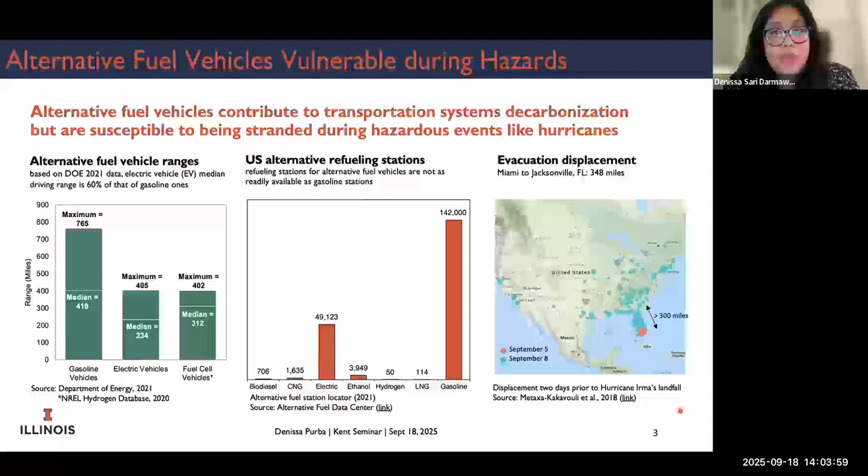While these technology specifications can still facilitate our daily mobility, they might challenge evacuation operations. A study of the evacuation movement of Miami residents during Hurricane Irma shows that the evacuation distance can far exceed 300 miles, exceeding the average driving range of some alternative fuel vehicles in the current market.

We also observe, especially in the US context, more frequent hazards in several regions that might require evacuations, such as hurricanes, severe storms, flooding, and also wildfires. As alternative fuel vehicle adoption increases, especially in these hazard-prone regions, it becomes very critical to provide evacuation preparedness planning for alternative fuel vehicle adopters in the future.

And since the introduction of alternative fuel vehicles in the US market, we found that there are no adjustments to the evacuation policy. FEMA and the Federal Highway Administration suggest that evacuation route planning needs to provide access to gasoline stations to guarantee the opportunity to refuel. However, there is no specific regulation on how alternative fuel vehicle drivers can access their refueling stations.

And then in the literature, in terms of modeling, evacuation models often neglect the range constraint and access to refueling stations. Most of them assume that every evacuee could always reach their destination without the need for refueling. And some models assume that refueling infrastructure networks are strategically located to allow every evacuee to refuel. While these assumptions can be applied to gasoline or conventional vehicle evacuation models, they might not be true for alternative fuel vehicles.

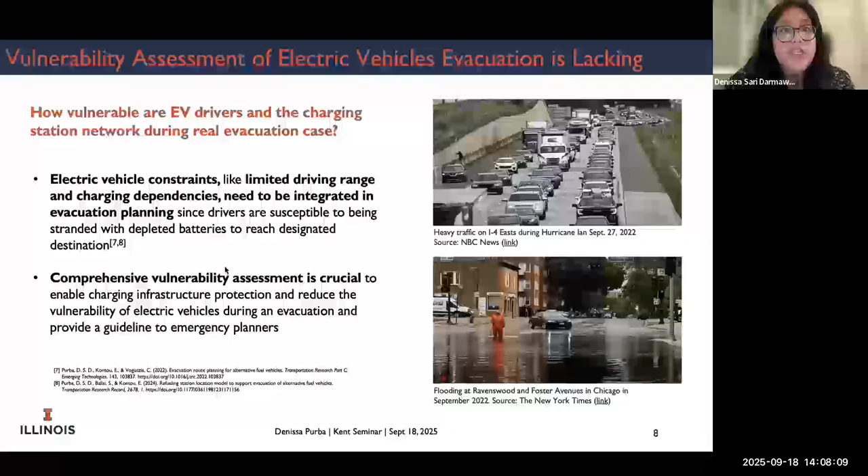Comprehensive vulnerability assessments become very crucial because in emergency planning, it becomes the first step for us to identify and measure the vulnerability of the evacuation systems, and also enables us to identify what kind of strategies and protection are needed to safeguard the infrastructure systems.

So in this work, we aim to develop a multi-criteria vulnerability assessment framework dedicated to EV evacuations. And we will assess current vulnerability of EV evacuation in 2 hazard-prone regions. Our approach consists of 3 main steps. First is the data collection to develop a representative evacuation network that can help us simulate the EV evacuations. The data collection consists of the hazard intensity, which is the hazard footprint itself.

We also consider the transportation networks and the charging station networks, not only the locations of the stations, but also the number of ports, type of the stations, and the capacity of the stations. We also collected the evacuation demand that we want to simulate in our evacuation networks, and also the share of vehicle registrations to design the shares of alternative fuel vehicles or electric vehicles in our networks.

Then after we construct the evacuation networks, we conduct the simulations for the hazard and the evacuations. We compare the evacuation performance under non-disrupted networks with the evacuation performance when we consider the impact of the hazard and disrupted networks on the system. And then we assess it with the vulnerability diagram.

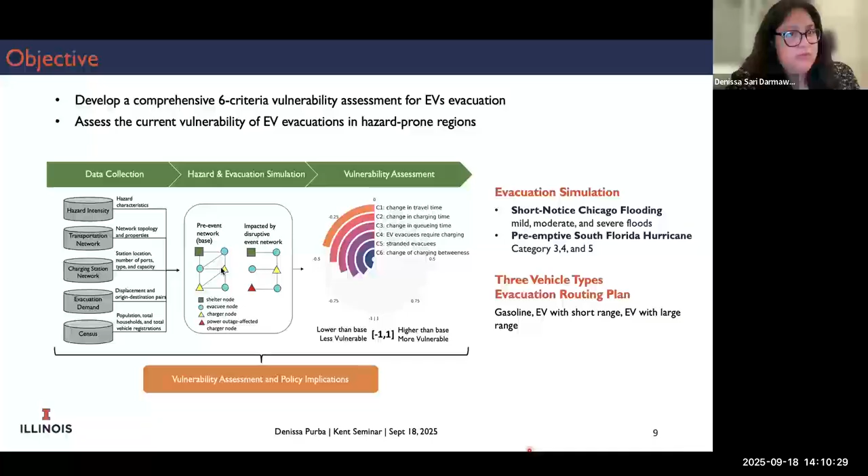Now I will talk more about the multi-criteria vulnerability assessment diagram that we propose here. It consists of 6 criteria that represent 3 components that we want to assess. First is the system level performance. We use 3 criteria to represent the system level performance during evacuations, which are the changes in average system travel time, charging time, and queuing time.

The second component that we want to measure is the evacuation mobility. We want to understand the total number of EV drivers that require charging and how many of them are stranded or isolated due to disconnected or disrupted networks. The last component is the charging station accessibility. We use betweenness centrality to measure the accessibility of charging stations used during evacuation processes. And then we present it in a radial diagram like this and normalize the values between -1 and 1.

Here is the Chicago flooding hazard scenario. We consider 3 types of flooding risks: first mild, then moderate and severe. All of the flooding footprints we collected from the FEMA Flood Map Service Center, and then we complemented them with MRCC Southwest Lake Michigan Regional Flash Flood Monitoring.

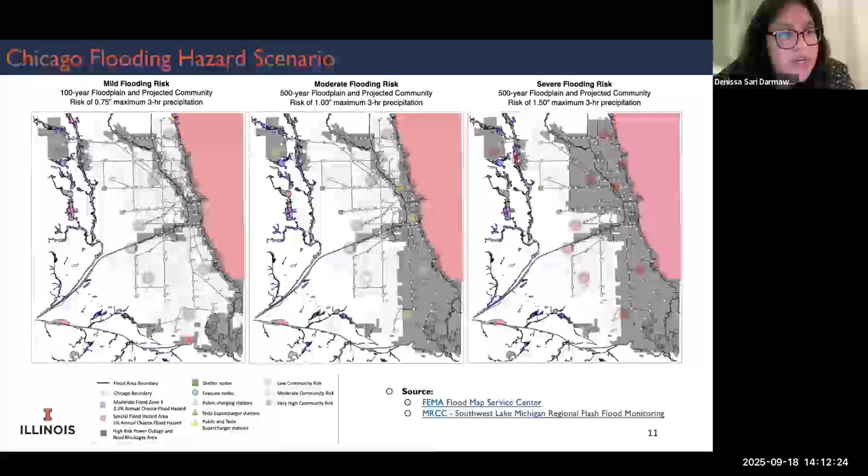For each flooding risk, we define a certain area where we assign a probability of power outages and also road blockage. So you can see this gray area here, we define it as a high-risk power outage and road blockage area, and it keeps increasing as the hazard intensity increases.

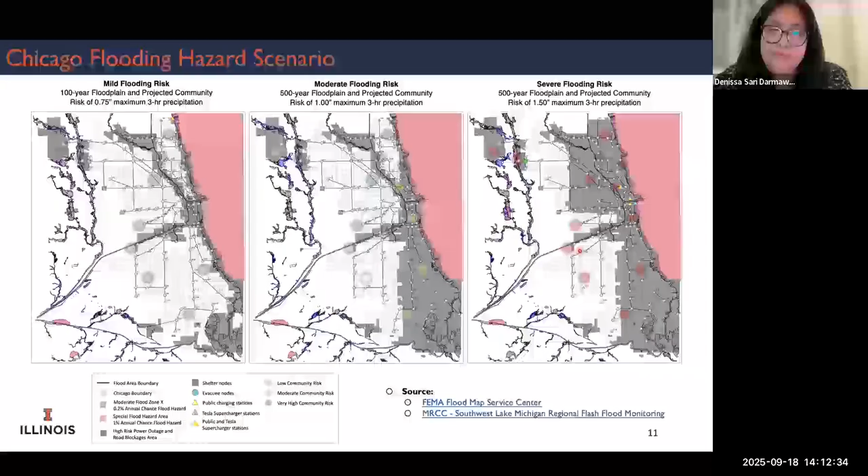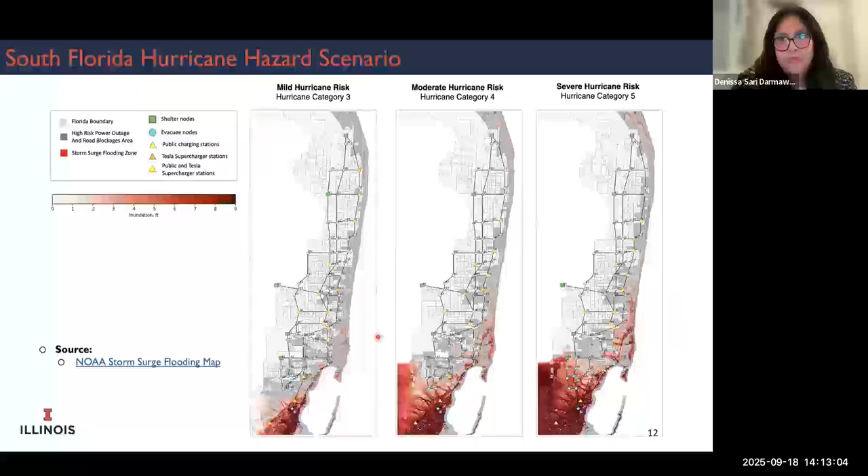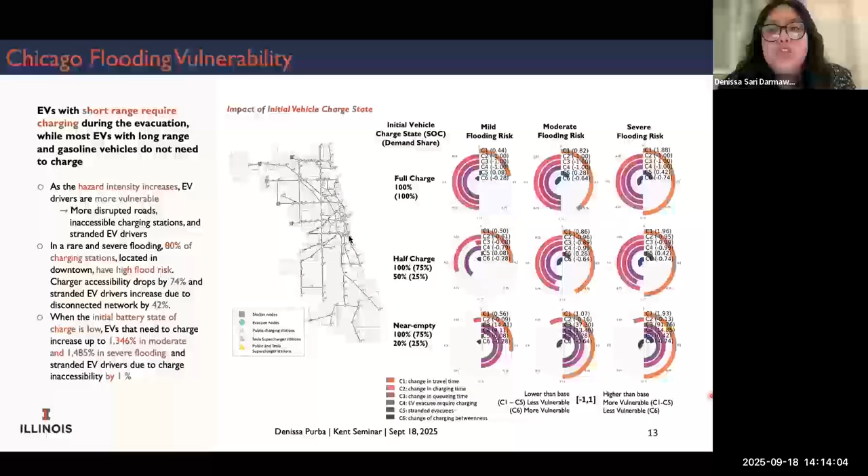Some key observations we found here are that EVs with short range always require charging during evacuation, while most gasoline vehicles and EVs with long range do not need to charge in these evacuation cases. And in rare and severe flooding, about 80% of charging stations located downtown have a high flood risk. The charging accessibility dropped by 74%, and stranded EV drivers can increase by 42%.

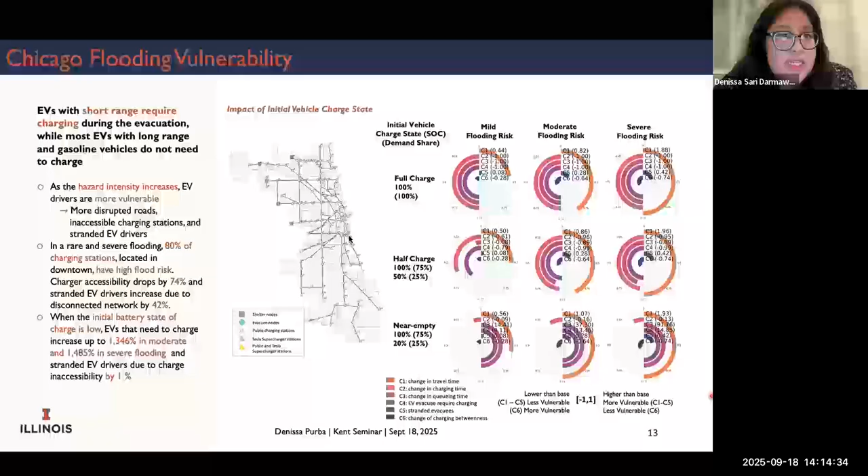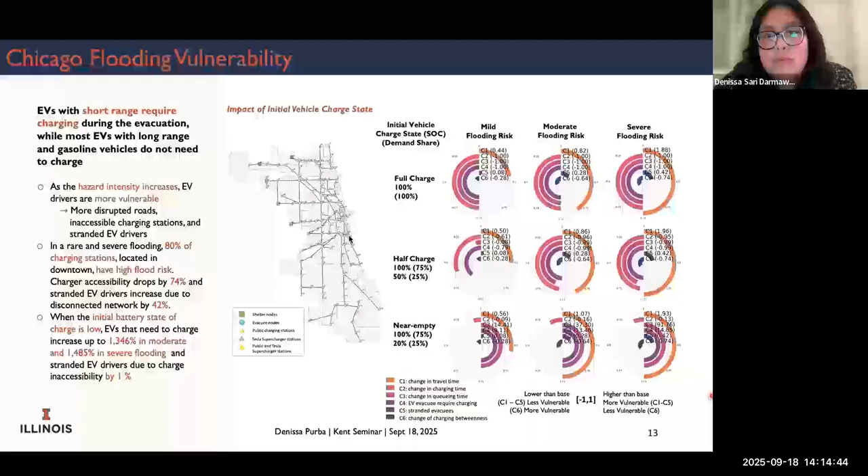When we consider the near-empty initial state of charge, we notice that the number of EV drivers that require charging, even in these small networks, can increase significantly due to the near-empty battery levels.

Here I also plot the energy demand profiles for Chicago evacuations. I think it will be of interest to some of you. I just want to highlight that our model can also show the energy demand profile for each charging station in our simulations.

The findings that we found here is that charging stations that are close to shelters, the shelters in the north zone here, are subject to higher charging demands. In our simulations, on average, the maximum expected energy demand in Chicago is about 337 kilowatt hours in mild, 270 kilowatt hours in moderate, and about 213 kilowatt hours in severe flooding.

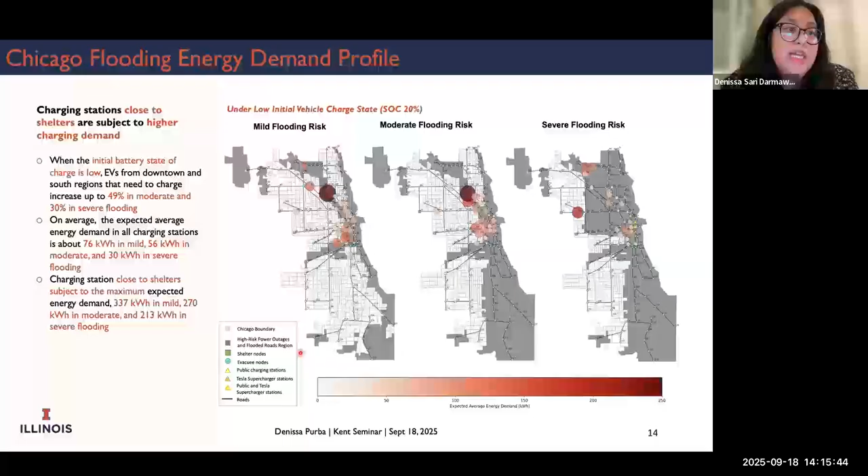Next, we also explore the impact of cold weather in Chicago evacuations. We consider three types of weather: normal weather, moderate cold, and extreme cold. And we translate these temperatures into their impact of reduced battery efficiency. So in normal weather, we consider that the vehicle's battery performs at 100% efficiency, moderate cold about 80%, and in extreme cold, it drops to 60%.

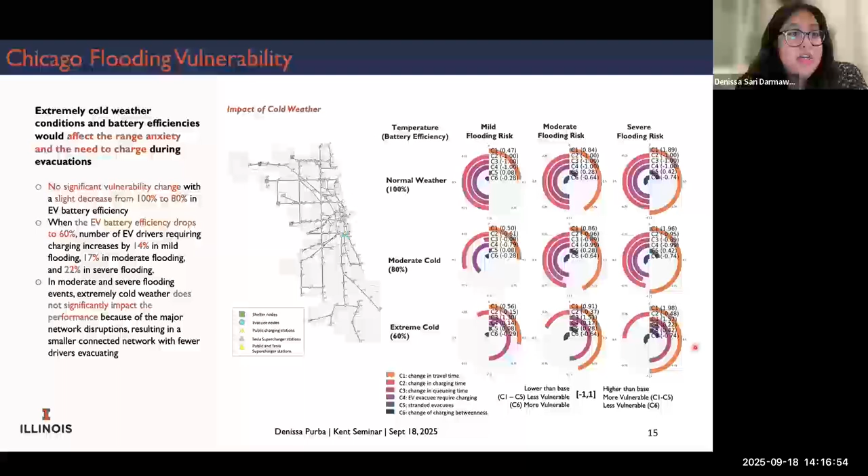And again, we visualize it with a 3x3 diagram to show the impact of increased flooding intensity and these different weather temperatures. So we found that extremely cold weather conditions and battery efficiency would affect range anxiety and the need to charge during evacuations. But the drop of 20% of battery efficiency from 100 to 80 is not really significant to the vulnerability changes. However, when it drops to 60%, we noticed that the number of EV drivers that require charging increased significantly, by about 14% in mild flooding, 17% in moderate flooding, and 22% in severe flooding.

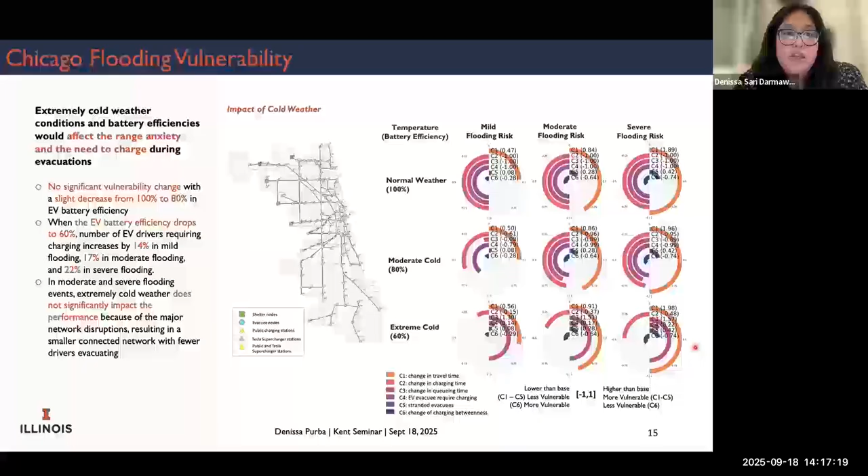Lastly, we assess the vulnerability of South Florida EV evacuation. In this case, we only consider the impact of initial vehicle state of charge because we noticed that during hurricanes, usually the temperature doesn't really change. There is no cold weather there. So we think that the impact of extreme weather is not relevant for hurricane evacuation. That's why we only model the impact of initial vehicle state of charge. Again, we visualize it with a 3x3 diagram.

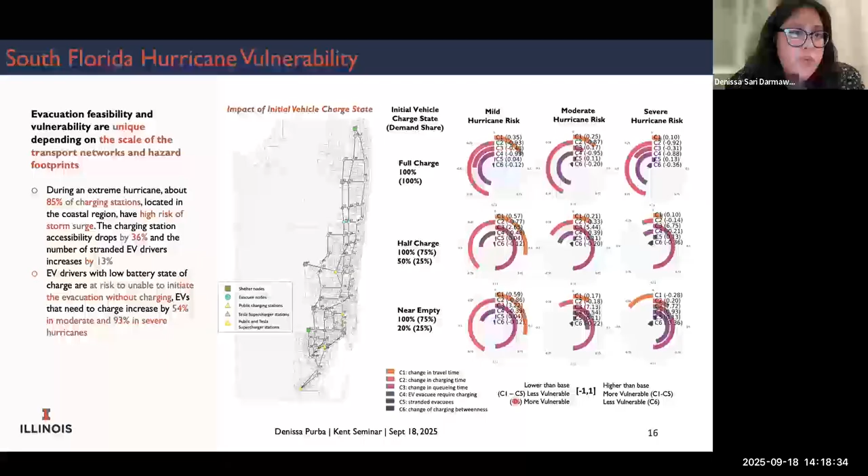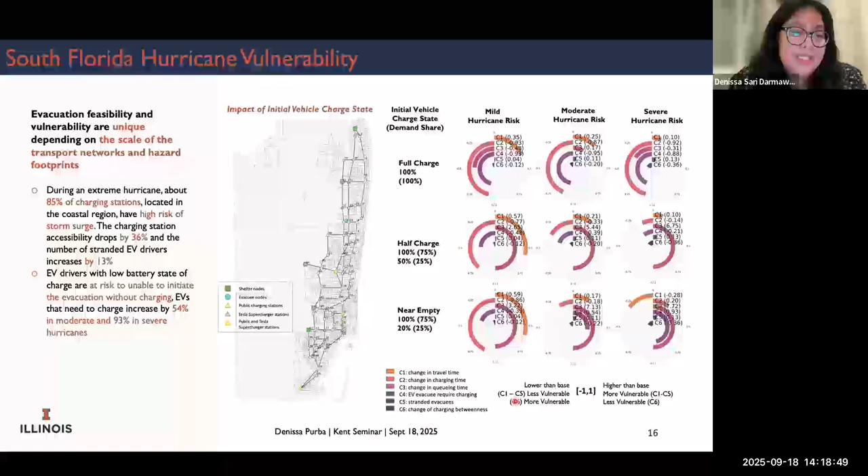Some findings that are interesting here is that the evacuation feasibility and vulnerability are unique depending on the scale of transportation networks and the hazard footprint. About 85% of coastal charging stations are at risk during an extreme hurricane, reducing their accessibility by 36% and increasing the number of stranded drivers in the network by 13%. And when we consider the near-empty cases, EV drivers with low battery state of charge are at risk of being unable to initiate their evacuation without charging. And we can see here that the EVs that need to charge increased by 54% in moderate and 93% in severe hurricanes.

So to summarize this work, we found that most EV drivers in the networks could evacuate safely with or without charging in mild and moderate hazard events. However, some EV drivers, especially those with short-range battery vehicles, rely more on charging station accessibility to complete their evacuations. We also find that driving range and charging station networks define existing EV evacuation risks. As hazard intensity increases, we consistently see that EV drivers become more vulnerable. However, the feasibility and vulnerability of evacuations are unique depending on the scale and properties of the networks and the hazard footprint. And the initial EV state of charge will determine the feasibility to initiate the evacuations. So that's about the vulnerability assessment work.

Now I will talk about the evacuation behavior of electric vehicle drivers. Here we conducted route and charging choice experiments. This work is advised and collaborated with Dr. Eleftheria Kontou. So now we're talking about behavior analysis during evacuations. Based on past literature, evacuation decisions depend on individual and household decision making. These factors can influence our decisions in evacuations. For example, do I need to evacuate? Where should I evacuate? When should we evacuate, or how should we evacuate?

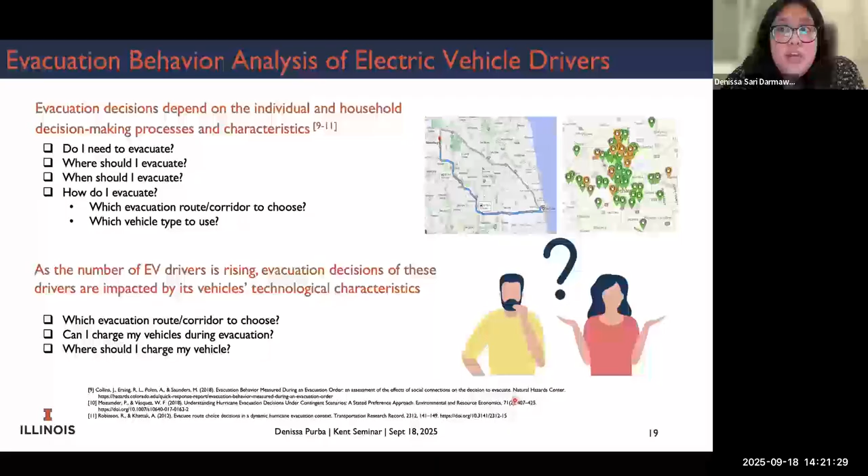Now, as the number of EV drivers rises, we believe that evacuation decisions of these drivers are also impacted by the vehicle's technological characteristics. The introduction of EVs might create new decision questions in the evacuation behavior field: which evacuation route should we choose so that I can charge my vehicle? Can I charge my vehicle during evacuation, and where should I charge it? So these are new questions that might arise with the introduction of EVs in the evacuation system. In this work, we're trying to identify the effect of various vehicle and charging station characteristics on EV drivers' evacuation routes and charging choices.

And to do that, we conducted a stated preference survey where we designed the EV evacuation route and charging choice experiments, considering their evacuation route, vehicles, and also charging station attributes. Then we developed logit-based models to characterize EV evacuation route and charging choices.

So here, there are four attributes that we consider. The evacuation characteristic will be represented with the evacuation distance. For road characteristics, we consider two types: distance to the destination, and also total travel time. For the EV characteristic, we consider the battery capacity and SOC at the origin and the destination. Again, SOC is the state of charge.

For the charging station characteristic, we consider the charging station location, the total number of charging stations during the evacuation, charging time, and queuing time. And we designed choice tasks according to these attribute parameters.

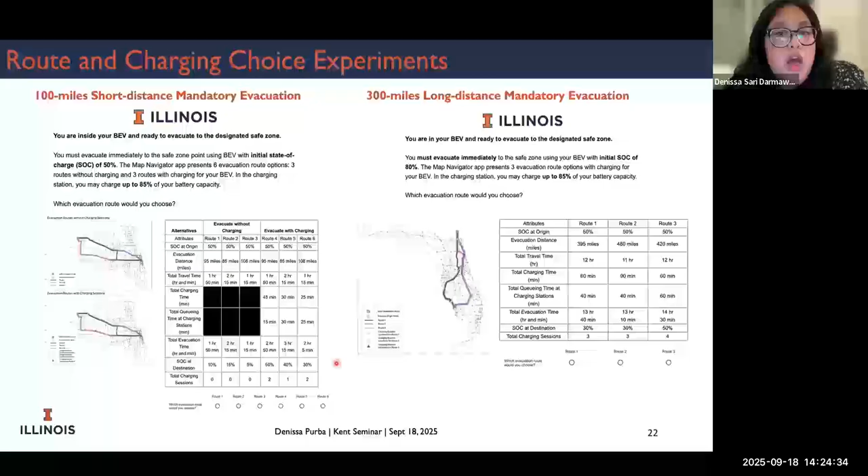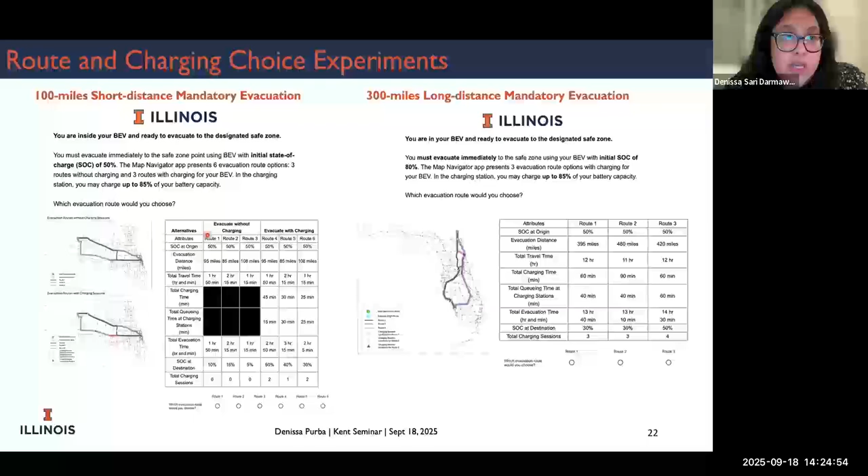And here are the illustrations of our survey choice tasks. You can see here on the left is the 100 miles short distance mandatory evacuation. We illustrated it in the Chicago network. So every respondent is presented with the picture of the evacuation route and the charging scheme. And they are provided with this table with 6 road and charging scheme options. 3 of these roads are without charging, and 3 of them are with charging.

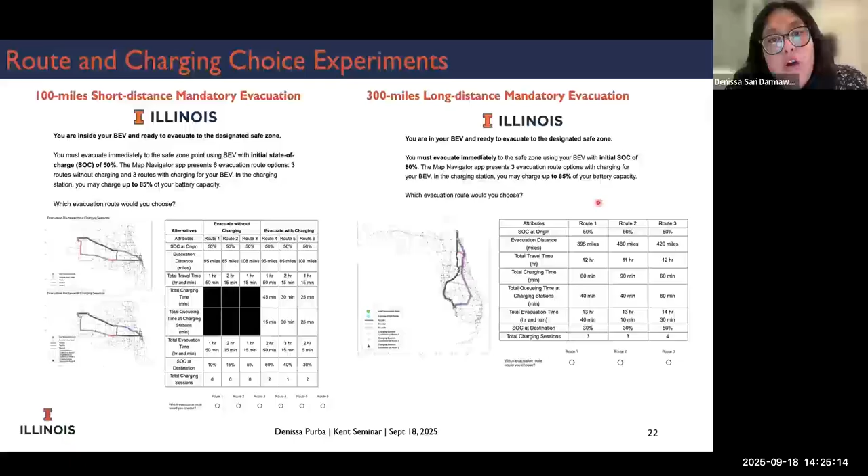On the right here is the 300 miles long distance mandatory evacuation case that we illustrated in the Florida network. Again, we have the maps of the roads and also the attributes of each road option. We presented 3 roads and 3 charging schemes that they can choose.

For the short distance evacuation scenario, we propose 3 models. 2 of them are multinomial logit models: the first model is to identify the impact of the main attributes, and the second MNL is to see the impact of the socio-demographics. And then we also check the nested logit to account for the correlations between road and charging decisions. For the long distance evacuation scenario, we propose 2 multinomial logit models, the basic one and one considering the socio-demographics.

Here are the behavior models for the short distance evacuation road and charging choice analysis. This is the first MNL, second MNL, and then the nested logit model. We tested with the main parameters. There are 7 main parameters here: distance, travel time, charging time, queuing time, total charging stations on the evacuation road, SOC at the origin, and SOC at the destination. We also check the interaction between SOC at origin and SOC at destination, and also the interaction between total charging stations and SOC at origin.

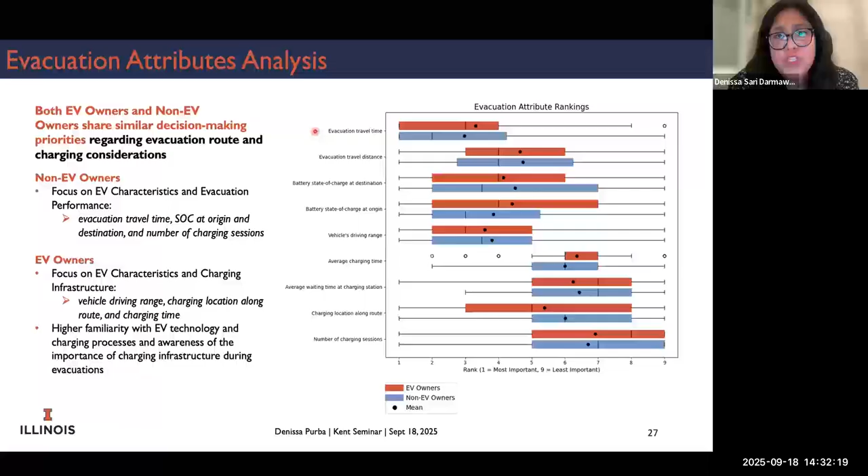The next part of this work is that we're not only designing the behavior model, but we also want to implement it in the evacuation routing plan. So we embed these behavior models into the stochastic user equilibrium traffic assignment to simulate the evacuations given the behavioral models that we developed. And we again use Chicago and South Florida from the vulnerability assessment work, and we simulate it under Chicago moderate flooding risk and South Florida moderate hurricane risk.

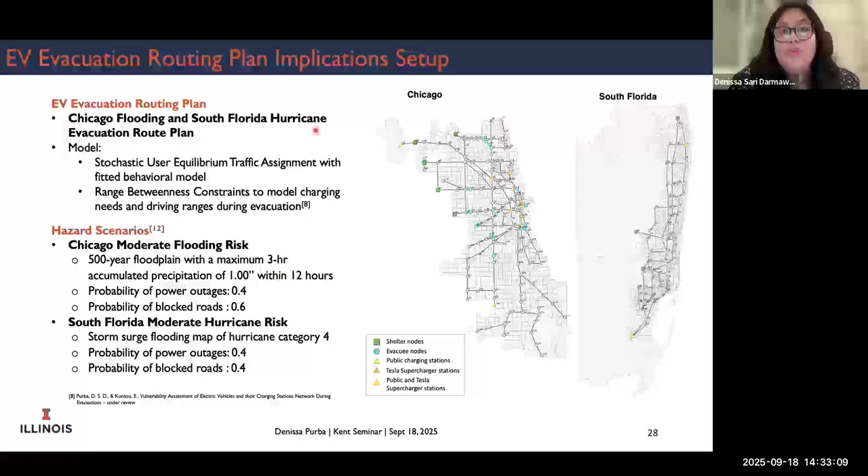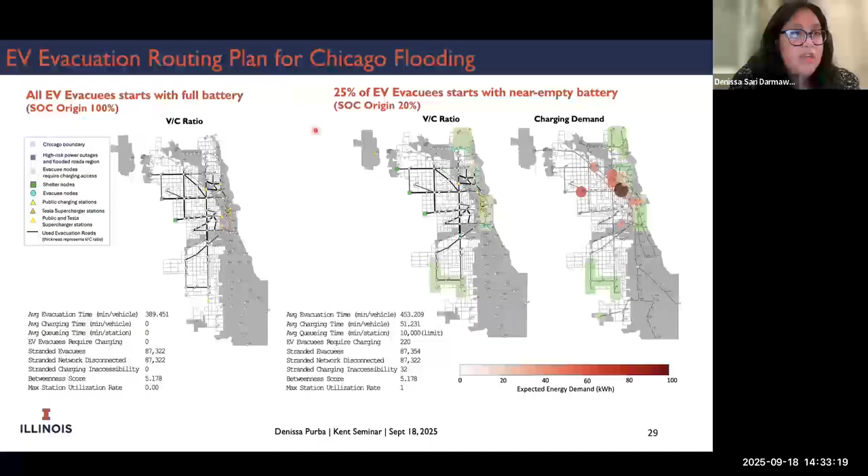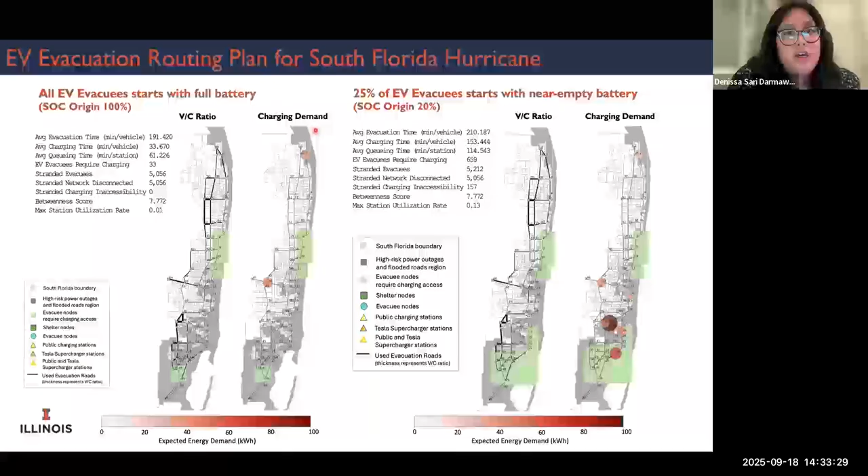And due to the limited time, I'm just going to showcase this: this is the evacuation performance considering the behavioral impacts in Chicago flooding evacuations, and this one is the evacuation performance considering the behavioral impact for the South Florida hurricane evacuations.

So this is the summary of findings for this work. We found that the non-EV owners still exhibit strong preference towards gasoline vehicles, probably due to some unfamiliarity with the vehicles, the charging, and also the evacuation itself. Whereas EV owners demonstrate more confidence, but still have some hesitations, particularly for long distance evacuations. We see the evacuation distance impacts the evacuation route and charging decisions.

Under short distance evacuation cases, when charging is unnecessary, EV evacuees are more sensitive to travel time and charging time. They still prefer not to charge. And when evacuees begin evacuating with low SOC, they are likely to choose routes that maintain high SOC at their destinations. Under long-distance evacuation cases, when charging is necessary, we found that EV evacuees are more sensitive to queuing time, and the EV evacuees make route and charging choices to maintain a desirable SOC at their destinations.

And we also see that when evacuees start with a high SOC at the origin location, they're still more likely to choose a route with high SOC at destinations.

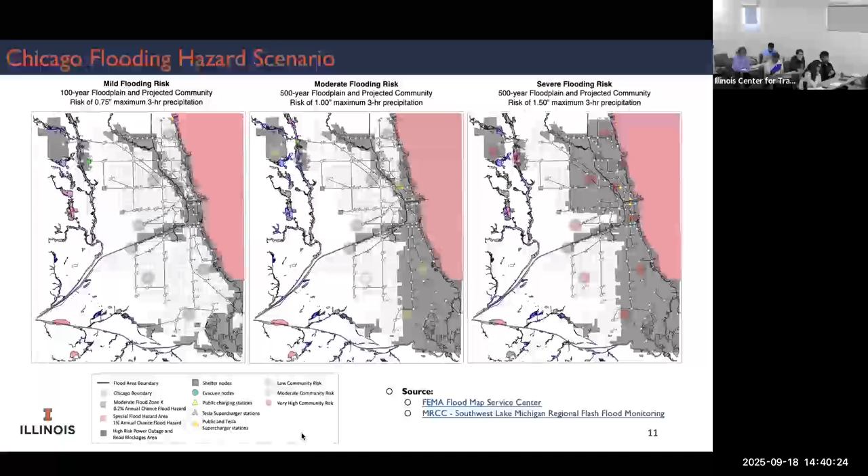Does anybody else want to ask a question in the room? Professor Yang, maybe? Thank you also for the presentation, very interesting. Just to clarify, maybe you said it but I missed it: in the final survey with the different evacuation scenarios, how do you address the reliability of the charging systems, whether the stations can be fully reliable or not so reliable, or potential congestion at those locations? Have you considered those in the survey?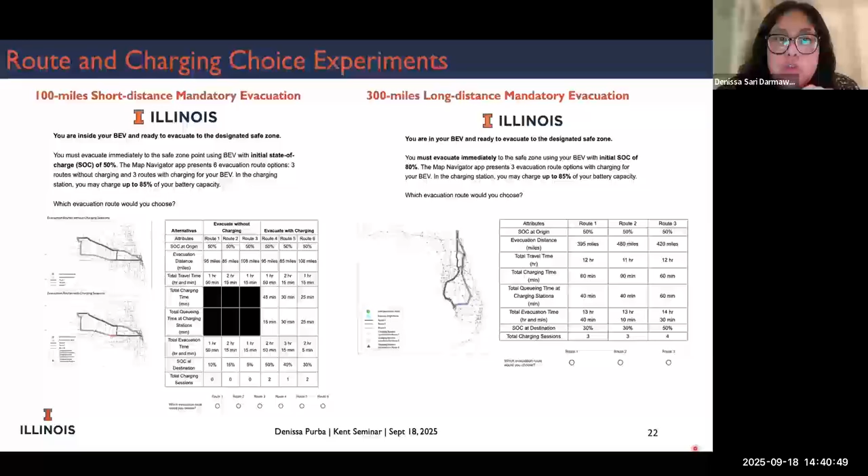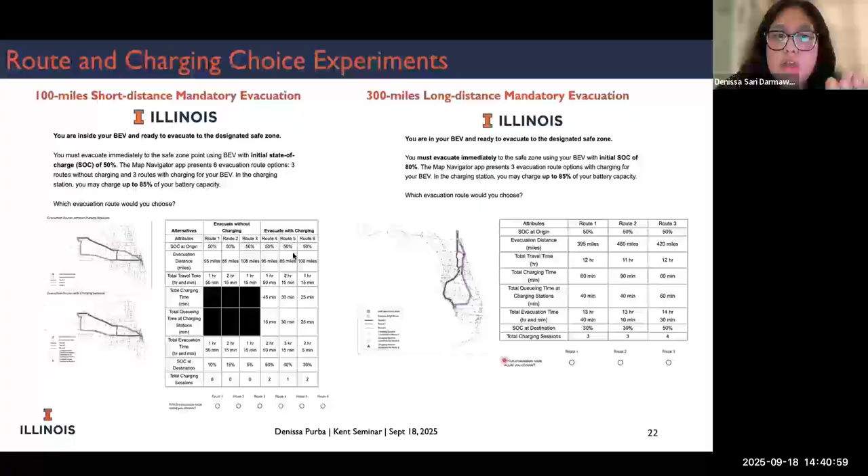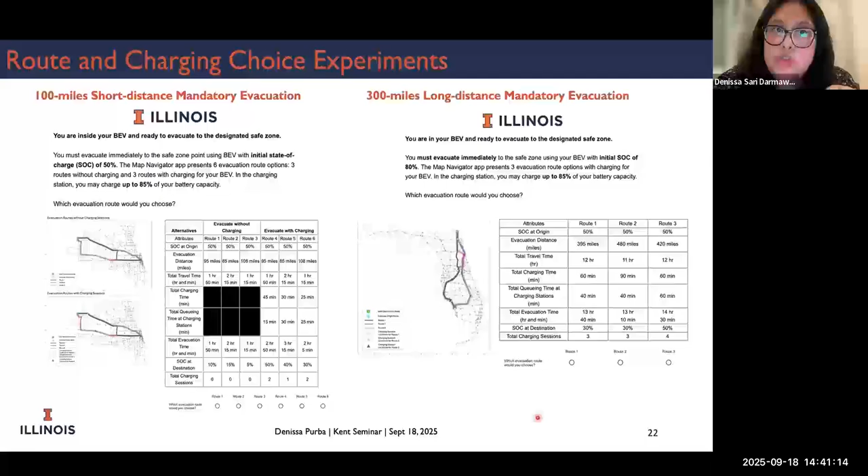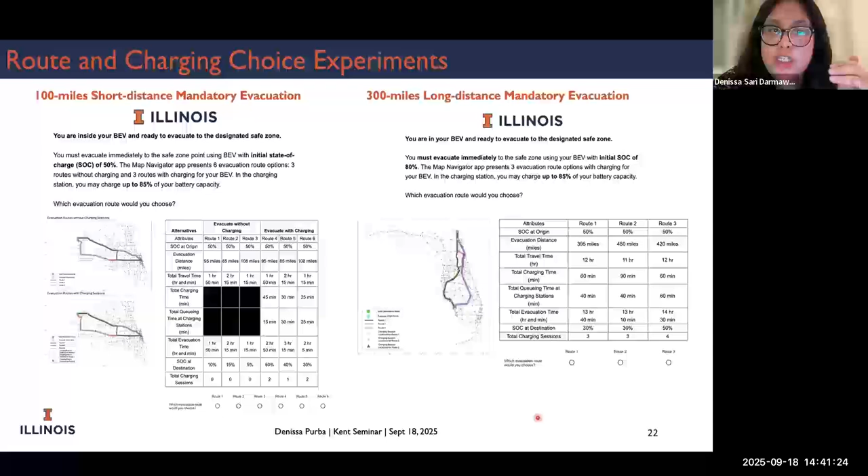No, I think here we strictly assume that the charging stations will operate in these route options. We visualize the locations of the charging stations, but we're not letting them choose where they want to actually charge, and we just put increasing total charging sessions as the variations of the alternative. I see. Yeah, I see what you mean.

That makes sense. The reason I was asking was, maybe there's this reliability issue, but also, sometimes when we commute, it's not about the expected travel time, it's rather the uncertainty with it. That will affect how we travel, right? So I was thinking maybe that will be another factor.

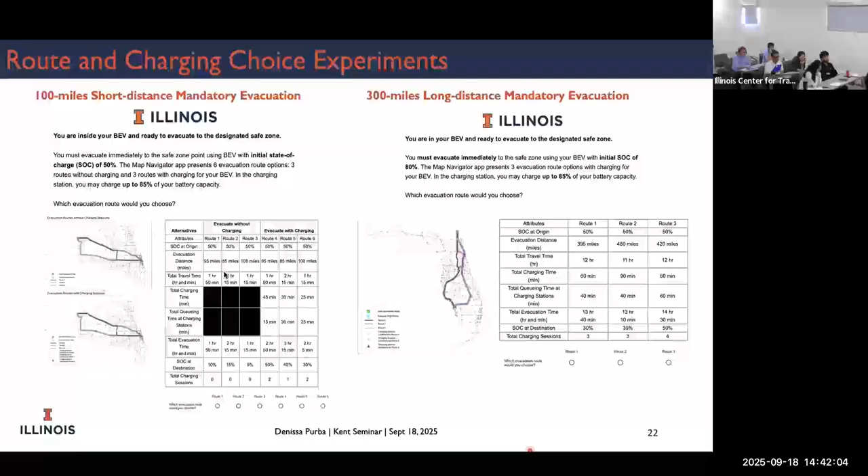Can I ask another quick question, Denissa? You mentioned autonomous and electrified vehicles on the last slide. Just curiosity, it's very interesting, I want to learn what you're thinking about the behavior in the autonomy domain.

Yes. From what I learned from the literature, and also seeing how the vehicle market grows, I noticed that coupled autonomous and electric vehicles are increasing more and more in the market. In terms of evacuation behaviors, there's always a premise that the autonomous system can increase the efficiency of evacuation processes and reduce human error.

So I was thinking about how we couple those things, because one thing that I noticed from the last questions, where we asked whether they want to evacuate with an EV or not, is that most of the respondents still choose gasoline vehicles, and I sense there is hesitance about the reliability of these electric vehicles. I think introducing autonomous systems in these vehicles might have a chance to reduce that hesitance. So I have an interest to explore that.

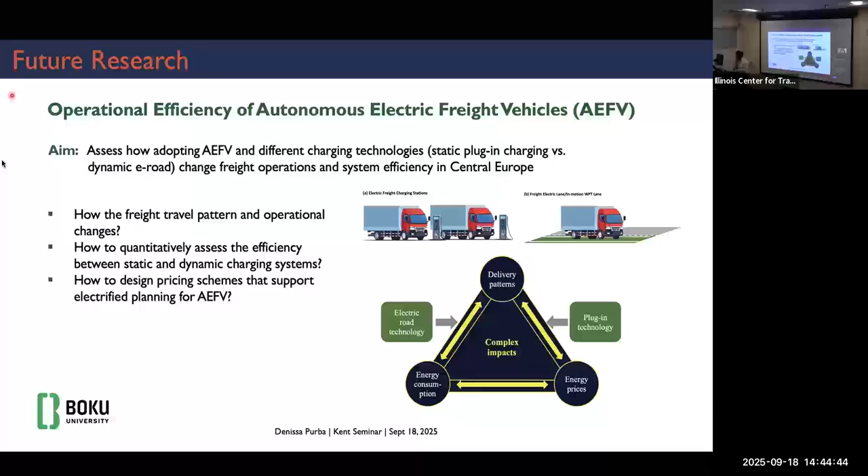Thank you. We have a question on Zoom asked by Mohamed Sawala. Mohamed, would you like to unmute yourself and ask a question to the speaker, or would you prefer me to read your question? Hello, everyone. We can hear you now. Okay, thanks. It's a nice presentation, first of all. It's a great topic for me.

But my question is, how long does it take to generate the evacuation routing plan for electric vehicles using the presented scheme? I mean, generating a routing plan for electric vehicles to leave the area. You mean computationally? Yes, how long does it take? With the current model that I use? Yes. Okay, so we use,

Do I have it here? Let me open the, let me try to close. Oops, there I lost it. Okay, you can share your screen again. Yes, we can see your screen now. Yeah.

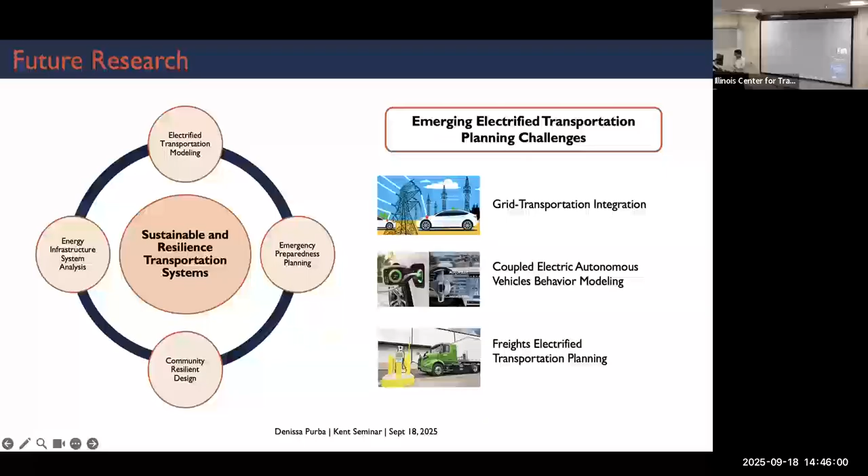I haven't really checked the computational performance for the short notice evacuation routing plan, but we did test the performance for the preemptive evacuation tree route plan in our first paper. I can share it with you after this, but I think with the size of South Florida, it's solved within 20 minutes. I hope it answers your question. That's great, thanks. I hope you could share the paper with me. Yes, sure. Thanks. Do we have any other questions in the room?